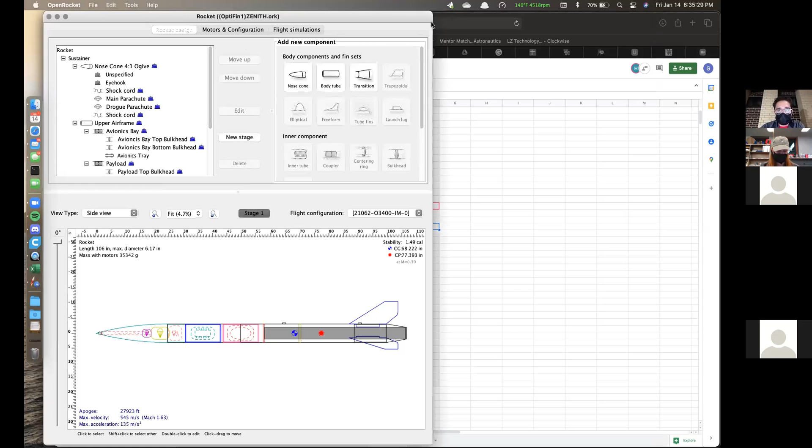I guess I can show this. Give it a second, it's loaded. So this is one idea. As you can see, the center of gravity and center of pressure are fairly close together. This is actually below the 1.5 limit. And this is only getting us to 28-ish thousand feet.

But if we want to keep an MMM design, or something that's inside of the straight section of airframe, then you have to have the fin stop right here. But you can't have the fin be right here without it reaching back, or else you're never going to get the 1.49 stability. Yeah, and it reaching over this edge right here is just a little bit too much.

Then let's open MATLAB. This is going to take a second too. But yeah, essentially, you just don't want the fins too long, or else they can shatter, or too far back, or they can shatter. And it's just been trying to find that Goldilocks zone.

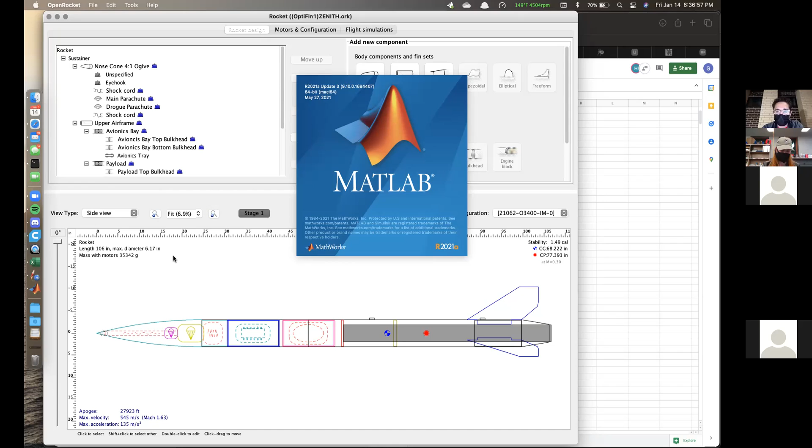I have a question. Yeah. So this as an idea to possibly bring the location of the edge of the fins up a little bit, would it be reasonable to have smaller fins, more like strakes almost, that aren't necessarily super structurally sound, but you can maybe fillet them onto the taper of the boat tail, just to bring the center of pressure back a little bit, so it'll give you a little bit more forgiveness. So like bring this down to here.

Like separate fins? Yeah, separate. It would be separate from the ones that are connected to the MMM. So it's like another epoxied fin that fits in there? Is that what you're saying? Yeah, it would be running along the taper of the boat tail. I don't know if I'm explaining it very well. Yeah, like along this. And it's just a separate fin that kind of fills in this hole.

Yeah, essentially. It doesn't even have to go too far out, the full diameter of the rocket. I guess we could play with it and see what type of numbers it gives us, but that was just my thought towards bringing the main fins forward a little bit. I mean, it's in the realm of possibility.

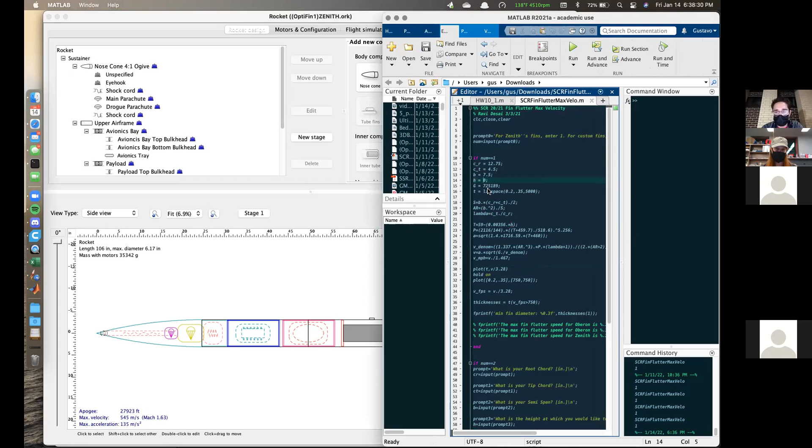I'll look into it. But essentially with the calculator thing, you plug it into here, and then there's the root chord length, the tip chord length, the height of the fin, the height you want to calculate at. I'm just doing worst case scenario, which is ground level, but I think the fastest speed is 8,000 feet. So I'll choose this one. And I'm getting the apogee, sorry, max velocity is here. Forgot how I looked at where the maximum velocity is.

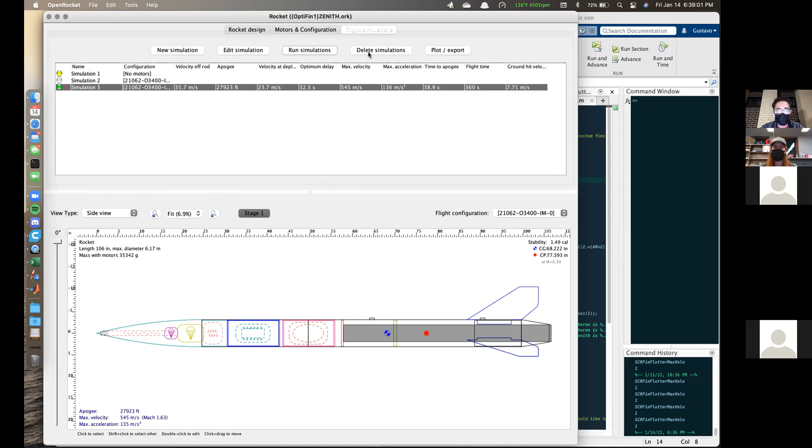Okay, I think I just did this. So I'm gonna plot next to this. And you look at this for the maximum acceleration, which is I guess before burnout. And this, if you go all the way down, actually, we want altitude. Let's just follow this line down up to here. So it's gonna happen around 7,000 feet. I don't know if that made sense.

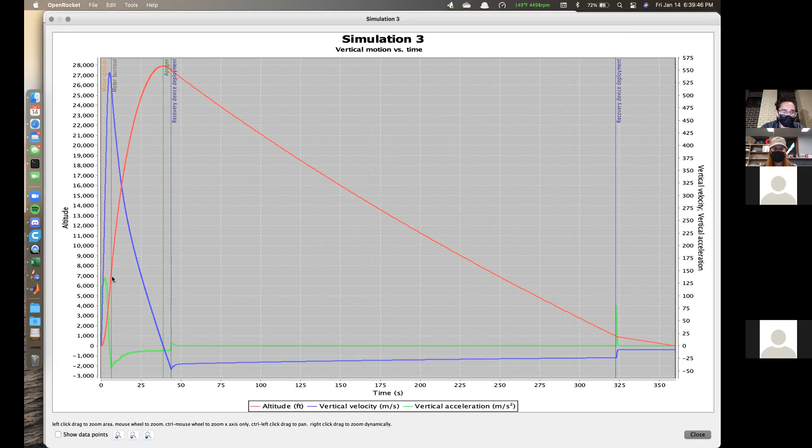I want the maximum velocity, which is on the blue line. And then I find along that same point, which I'm just gonna use burnout, follow it over to the red line, which is altitude. And that gives us around here, which is around 7,000 feet. So we can plug that into the MATLAB. Our 8,000 feet. This is the shear modulus of carbon fiber, and then just some thicknesses to display as a range.

We're gonna run it. Tell it we want to use Zenith's fins, which are those values. We'll run it. This is just a little visual. So this is the 750 feet per second, which is the 1.5 factor of safety. And then this is the fin flutter velocity at each thickness. So this is in inches on the bottom axis.

This is your velocity. So with a fin that is a quarter of an inch thick, you go up to like 500 meters per second. But if we want to hit that 1.5 factor of safety, we would need a fin thickness of 0.322 inches.

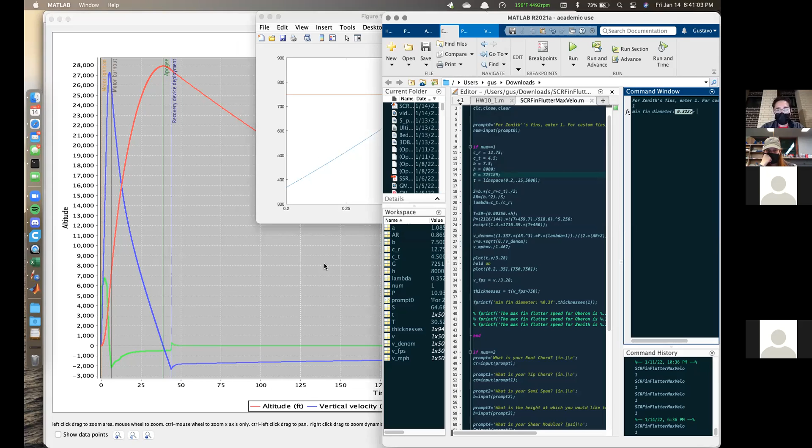So it's just running back and forth. And so, once you go back to OpenRocket, you come over here, you go to your fins, and then you plug in that 0.3222. This is, I think, a different fin than it was there. But then it updates your apogee, and this gives me an apogee of 28,000 feet. So technically, that little decrease in thickness makes it better. But yeah. And then in terms of that, let's do this.

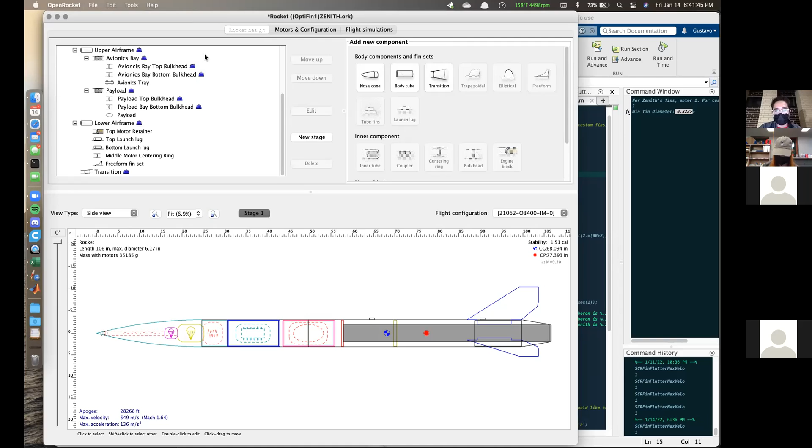This is another idea for the fins. This is considering we would put it on the boat tail. So if we were to put the fins on the boat tail, there are a few more things to consider, such as how are we going to glue it on? Is the joint going to be strong enough? All that stuff. But answers are out there. We just got to look for them. The second thing to consider is I don't know how OpenRocket calculates these fins if they are not on the outer diameter of the rocket.

So to add fins to the boat tail here, what I had to do is I added a body tube, which is 0 inches long at the end of the taper. That way I can add the fins to that body tube section. It essentially doesn't exist, but it's just so I could add it. Then I add the fins, but as you can see, the fins kind of go inside of the airframe. And that gives me a pretty good apogee of 28,500 feet. Not 30,000, but fairly close, with a decent stability.

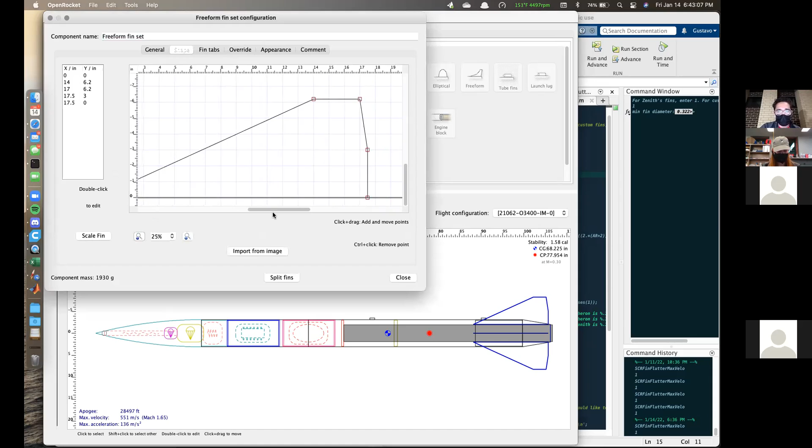But if I go over here and I look at the shape of the fins, and I try to make it like a fin tab. So let's say I make it like that, and this is going to be the 1 inch. So by making that flat thing right there, which should not have changed much, it takes away like 700 feet. So there's something weird, because how the fins react inside of the airframe shouldn't be calculated into the apogee, but it is. So I can't say for sure how that would react. We'd have to look deeper into it.

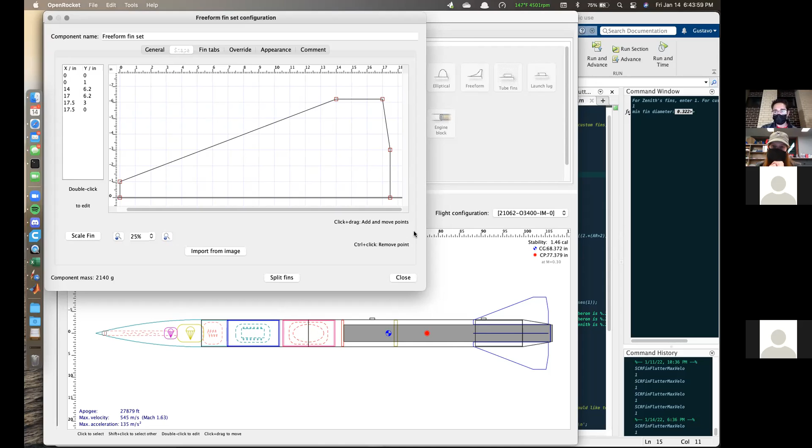I just have a question for everyone attending the lab in person next semester. Does anyone have an issue with the biweekly testing that we're enforcing? Is everyone gonna be okay to just get a COVID test and then come into the lab that Friday? Actually, can those just be done at the campus testing site? Yeah. And are those instant, or what testing do they do over there? It's the PCR testing, and the results are usually 1 to 2 days.

Okay, sounds good. Wait, when I got tested on Monday, I got my results by like Wednesday at 2 a.m. So basically Tuesday night. Wait, is that test required for everyone, even if we're already vaccinated? Yeah. Very cool. I'll be messaging everyone else as well, asking them the same thing, and asking if they're excited about the semester, just to reach out to all of y'all.